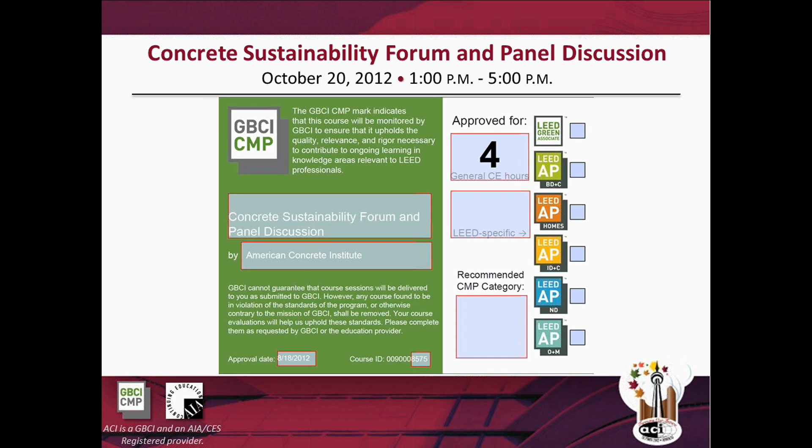The learning objectives are as follows: understanding the impact of climate change and resource depletion on structures and high-performance buildings; identify opportunities to mitigate the impact of earthquake, tsunami, and climate-related disasters on communities and structures; understand opportunities to balance the need for safety, durability, and resilience with environmental stewardship and economics; and finally, identify opportunities in the concrete industry for structural concrete, life safety, material selection, concrete repair, and enhanced durability to impact resilience and sustainability.

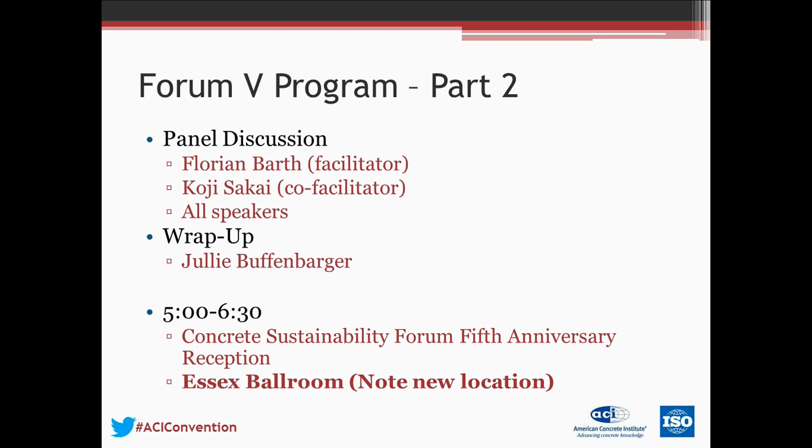So this is what we are going to do this afternoon. Enjoy the forum.

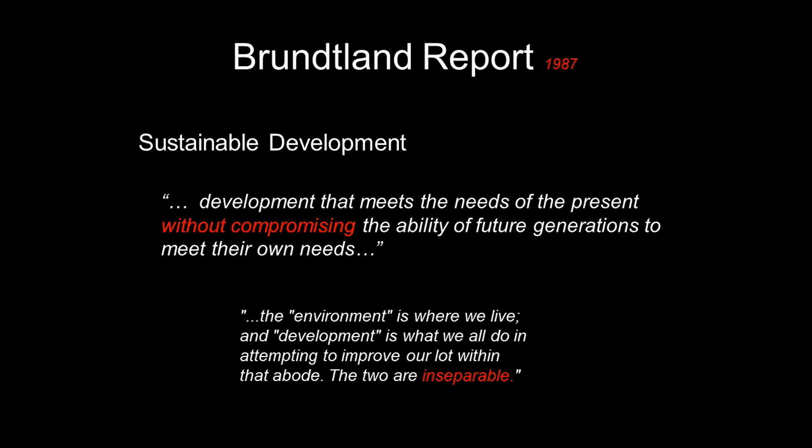Mrs. Gro Harlem Brundtland, who was a former Prime Minister of Norway, had been selected to lead this commission or working group from a United Nations designation, and I think it was very important work and really a very good timing in terms of the world and what was happening in the world with the resources.

I think the other thing that really came out of the Brundtland report were what are the pillars of sustainable development, and certainly economic growth, environmental protection, and social equality represent the pillars of the stool, if you will, a three-legged stool, which we need to stand on in terms of our design.

It's hard for me to separate my role, as I have two jobs, one job is to be a structural engineer, and the other job is to be chair of the 318 building code, this code cycle. So I'm going to talk a little bit about my look at sustainability as a structural engineer, and one of the projects that I'm most proud that I worked on was a very simple structure, but it really represented, I think, the key to what we're talking about in sustainability.

It's the repair of the Marina Del Rey seawall, which is in Los Angeles, California. I wrote an article with my colleagues on the project that appeared some 13 years ago in Concrete International in 1999. Marina Del Rey was the largest man-made small craft marina in the United States.

It was built by the Corps of Engineers in the late 50s and early 60s, just north of the LAX airport. Over time, it's actually owned by Los Angeles County, and they essentially lease land for development over a long period of time.

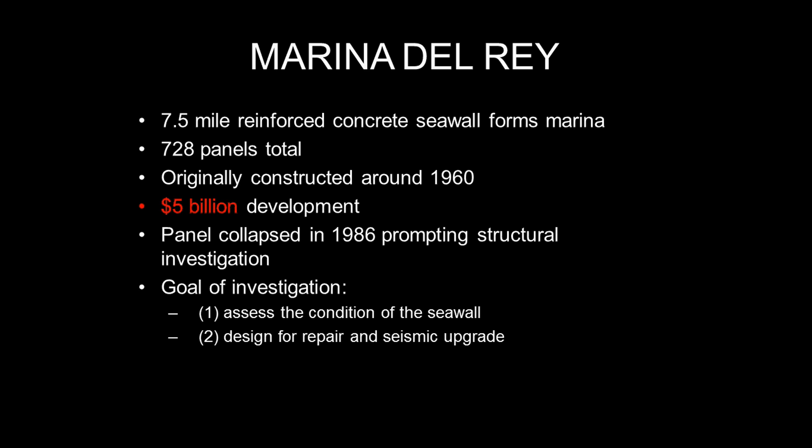And so we had to assess the condition of the seawall and design for the repair. It was obviously clear once we got into corrosion problems, but of course the other thing in the late 50s and early 60s, there really was not any consideration for seismic upgrading.

One challenge we found as a structural engineer is when you have that type of material, short of digging caissons or rehabilitating the soil behind it, there's very little you can do, and the cost of that is extreme. And we look at the economic challenge of sustainable structures.

I tell everybody, one piece of paper that I have in my file, that I always will have in my file locked away in a firebox, is a letter from the building safety person at Los Angeles County that says we're not responsible if there's liquefaction in this area. So I have that hidden away just in case it ever comes back to try to haunt us.

But it provided the uniqueness of it, provided the challenge: here's the structure we have to repair. There's all these things that we have to deal with, but there's not enough money in the world to deal with them, so you can only deal with certain realities. The reality was to make it stable for the corrosion aspects that had obviously deteriorated the structure, and also to upgrade it seismically for a more moderate earthquake, not one that would produce a high level of liquefaction.

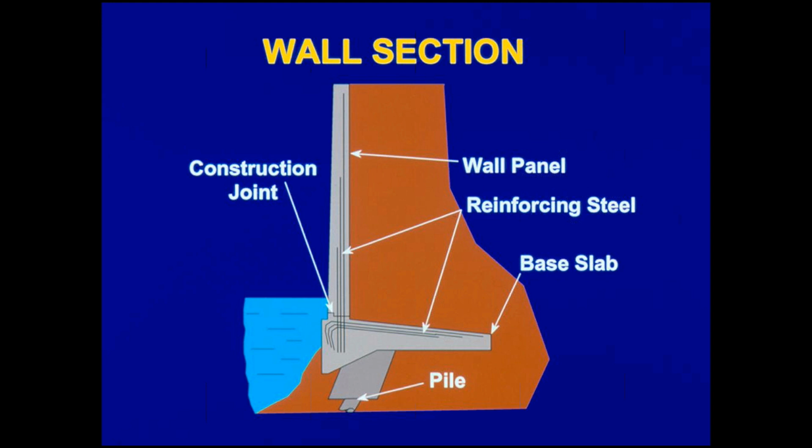The project evolved to look at replacement with other types of armament, if you will, in terms of protection. We were able to identify the damage on the back side of the wall using non-destructive techniques, namely impact echo, which let us identify delaminations of reinforcement and the areas they were occurring in.

So the system ended up being, as a retrofit, repair and rehabilitation for strengthening, caissons that were tied back to the wall. We had to utilize the existing reinforcement both horizontally and vertically, and the number of caissons was dictated by the amount of damage we found.

All wall panels had to have at least 3 caissons in order to strengthen the wall, but some, because of their condition, had to have 6. By prioritizing those panels and doing a custom look at each one, we were able to save on average 2.6 caissons per panel, which was a substantial amount of money.

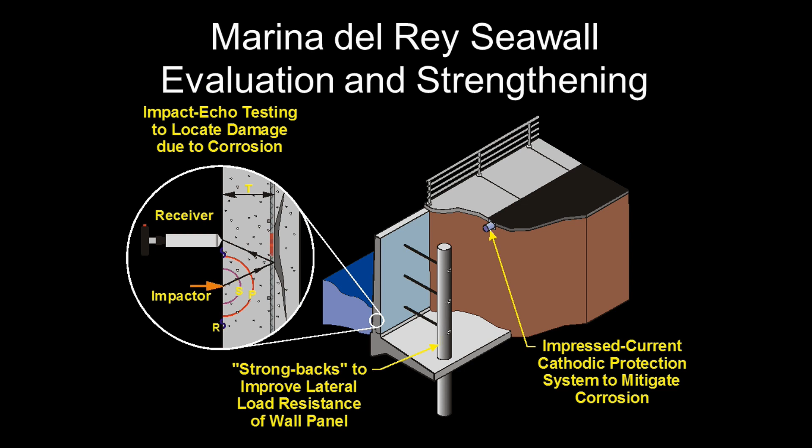So again, the overall concept was these caissons. There was an impressed current cathodic protection system put in place to protect the existing reinforcement we were counting on.

I bring this up again because as a structural engineer, the kinds of things we have to look at in a building code, whether it's the 318 code or the new repair code coming out by ACI, involve real economic challenges.

In this particular case, the reason I said it's not necessarily the most challenging in terms of engineering is that we were able to save a substantial amount of money by increasing the life of the structure from something that had been 25 years to something we believe will get another 40 years, with replacement costs in the range of $200 million plus.

The FIB Model Code talks about their new 2010 code regarding performance requirements for sustainability. Under Article 3.4 of their code regarding performance, they note that all aspects of design, construction, use, conservation, demolition, as well as recycling and disposal that are relevant to the environment and society are taken into account. That's a pretty bold, broad statement in the context of design.

I'm not sure what it means exactly, but I guess part of their effort in the code - and what you'll see we're doing in 318 - will be the challenge of what we mean by sustainability design.

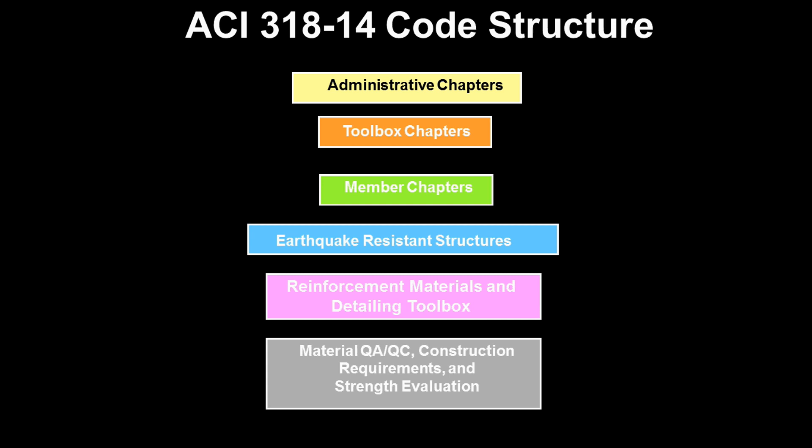When you go through a code chapter designed here on a beam, you're going to know at the end of that chapter that you've completed all the requirements for a beam. It's broken out into administrative chapters and what we call toolbox chapters, but the focus is on the member chapters. The decision was made that the earthquake-resistant component of design is still going to be kept separate—there have been a lot of changes over the last several cycles with that. We didn't want to disrupt the design community even more than we already were. Then we have chapters on reinforcement materials and detailing, and at the end is the construction process, where the QA/QC requirements are going to be located.

So here was our first attempt on 318. One thing you're going to find out is we don't make decisions very quickly on the building code. It takes a long time, a lot of votes, and a lot of times they don't go through.

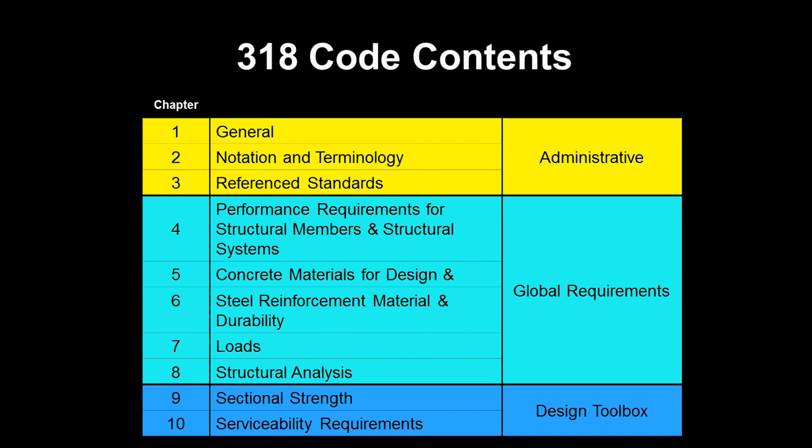So Chapter 4 is a new chapter called Performance Requirements for Structural Members and Structural Systems. It's new—we felt there needed to be an overarching chapter representing what the design guidelines were for in the member chapters, and that's a logical position where we might include something like sustainability.

So the first attempt stated: materials and components of structural concrete shall comply with the sustainability requirements in the general building code. Well, there were lots of negatives. Here's one: 'I agree that sustainability is becoming more important, but to state that all thoughts of any committee, 130 for example, shall be followed is way too strong. Let's see what they develop and what we might reference. Until then, delete this sentence.' So that was the first ballot.

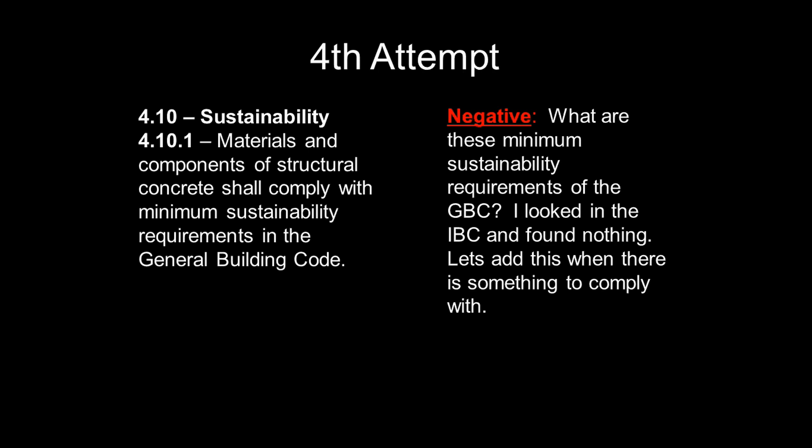Here's the fourth attempt, Sustainability section 4.10: materials and components of structural concrete shall comply with minimum sustainability requirements in the general building code. Well, appropriately, one of the negatives was, what are these minimum sustainability requirements of the general building code? They went to the IBC, the International Building Code, which is basically the model code most of the United States follows, and found nothing. The comment was: let's add this when there's something to comply with. Pretty fair statement, I believe.

So here's the final approved text that the committee agreed on—the section numbering had changed a little bit. Section 4.9: the licensed design professional shall be permitted to specify sustainability requirements in addition to the strength, serviceability, and durability requirements of this code. It's a pretty weak sentence in a lot of ways, but at least it has the concept of sustainability. You can see the focus is that we don't want to do anything in sustainability that's going to harm the minimum safety requirements of the building code. That's really the subtext of the message there.

Section 4.9.2 goes on to say that strength, serviceability, and durability requirements shall take precedence over sustainability, reinforcing that idea. In order to provide some emphasis in Chapter 4, we felt like we also needed something in Chapter 1, which is the introduction to the code, after all.

We're on the 5th ballot here, and we still don't have it approved, so that gives you an idea of how tough this job is. Really all we're doing is adding something on the right-hand side there, which is the commentary: the purpose of this code is to provide for public health and safety through structural strength and stability. This code is intended to be compatible with sustainable design principles that do not conflict with public health and safety. Pretty innocuous statement in our mind, apparently not to a lot of committee members. So we're on the 5th ballot of that. I think we may end up being successful with some additional wordsmithing, but those will be essentially the 2 locations that the 318 building code will identify aspects of sustainable design.

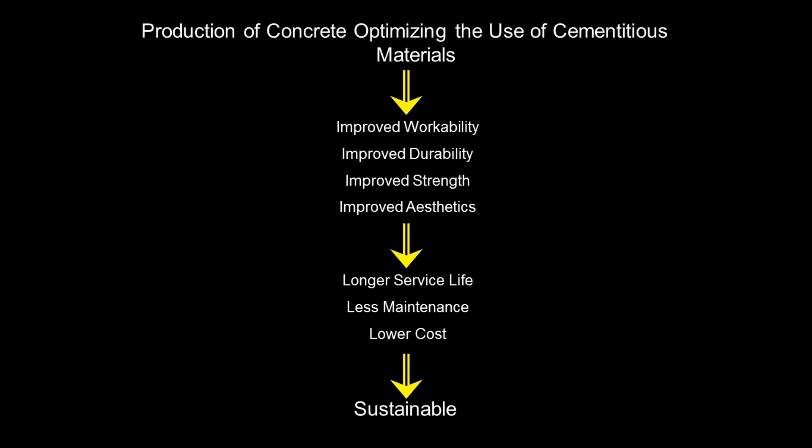As structural engineers, maybe we haven't given ourselves enough credit over the years that, in fact, that's what we have been doing. We just didn't call it sustainability. So we're recognizing now that some of the things we do in design can, in fact, lead to sustainable development, longer life, and the general good of society.

So what's the summary here? As you can see, it's something in the code. We've got a long ways to go. We're certainly not going to get much further in this code cycle where we're at. Certainly, I think what we've done is add to the code and take the charge from former President Barth and Staley very seriously, and have something in the code, at least in the spirit of sustainability. So with that, I'd like to conclude my presentation and be glad to take any questions.

Thank you very much.

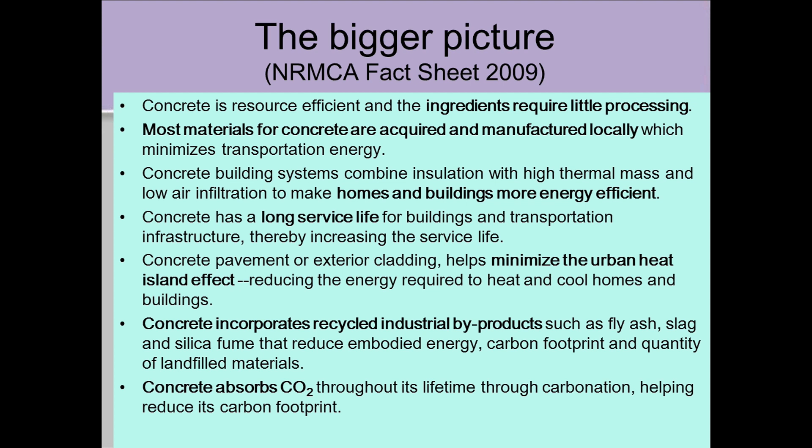Now, just to explore a couple of those issues: the embodied energy in a building from concrete, from the initial construction, is only about 10% of the total, maybe 10 to 15%. The rest of it's in the lifetime use of the structure, all the power and HVAC requirements are what eats energy. So if you can make an impact in your design using concrete to reduce that, you can have a much bigger impact than worrying about bits and pieces of the concrete mixture over the lifetime of the structure.

So there's another way, and the other way, of course, is to use the thermal mass of concrete elements to mitigate the HVAC requirements.

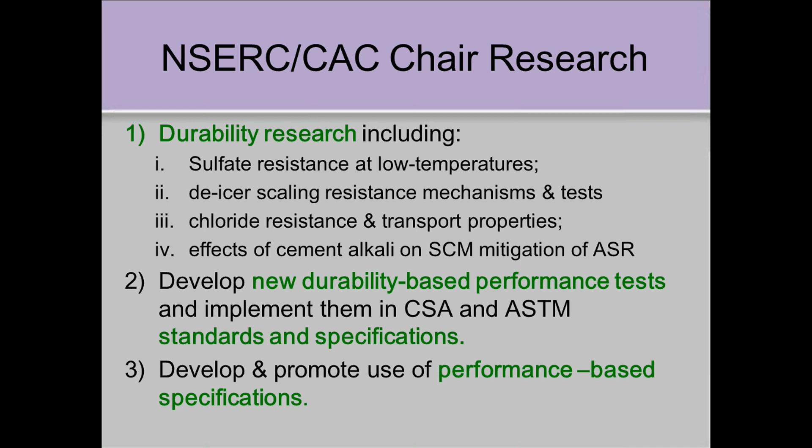And particularly on reducing the CO2 footprint of the concrete that's used in the first place. We've got a lot of students working on Portland limestone cements, which were introduced, and I'll talk about that.

Looking at the synergy of these Portland limestone cements with traditional supplementary materials like fly ash, slag, and silica fume in multiple blend binders, which are becoming more common.

We're looking at combined aggregate gradations, which is not new, but it's new to the Canadian code, to try to optimize the combined aggregate gradation. Because if you can do that, you can reduce the required cement content and actually improve the properties of concrete, reduce the permeability, reduce shrinkage, and other good things. We're also looking at non-Portland cement binders, alkali-activated materials, and doing work with recycled concrete aggregates.

Now I'll mention a couple of these things. We can do all these things at once. A lot of these aren't individual things you can only do separately — you can usually do almost all of them simultaneously, and we are doing them.

If you can reduce the cement content, as I mentioned, from combined aggregate gradations, and of course water-reducing admixtures will allow you to use less water, reducing the paste content of concrete, which allows you to get more aggregate in. The Portland limestone cements reduce the clinker content of cement.

And the way we've designed these Portland limestone cements, they have equivalent performance to Portland cements, so you're not losing anything — it's fairly transparent to the users. And of course, we can use cement replacement materials such as fly ash and slag.

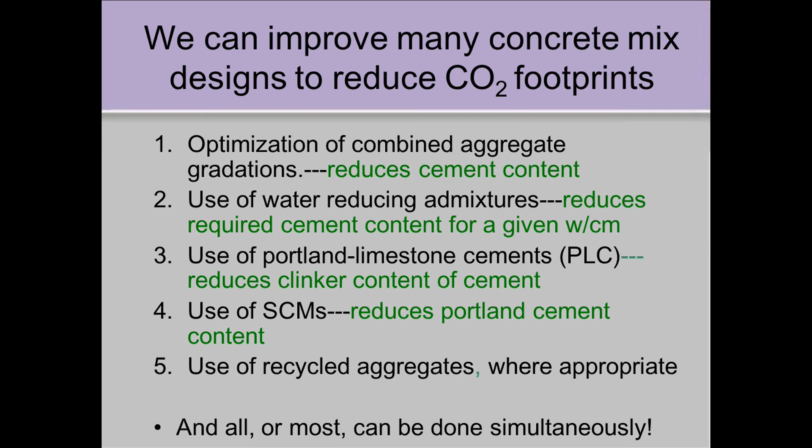And with recycled aggregates, I think we have to use them where appropriate, and we can use them. So the problem with the aggregates — a number of agencies in the U.S., various state highway agencies and others, have recognized this in the past; we're just a little slow on the uptake — is that meeting the individual coarse and fine aggregate gradations leaves a gap in the middle.

You end up with a gap-graded mix, and it's a huge impact in urban areas, because they're blasting these quarries, sieving it out for coarse aggregate, and throwing away a whole bunch of undersized material that's not allowed in the specification because of the gradation envelopes. Then they add the sand, and they end up with a gap where the stuff they just threw out would fit.

We're doing work on that for the industry, just to show that if you take an intermediate size aggregate, that could fill in the spaces. This is typically done more so in Europe, where they have multiple bin silos. This hasn't been the North American tradition to do that.

If you look at a grading curve, if you just took sand and stone, you end up with a little gap in the middle. It doesn't look like much, but it causes you to have issues.

Filling that gap in the mixes with 35 MPa or 50 MPa concretes, we were able to reduce the cement content of the mix for equivalent performance by up to about 16% of the cement binder composition of the concrete. So it's not a trivial loss of cement, but you get the same performance with less cement, and then you're not throwing away some of these quarried materials that were expensively crushed or blasted and crushed.

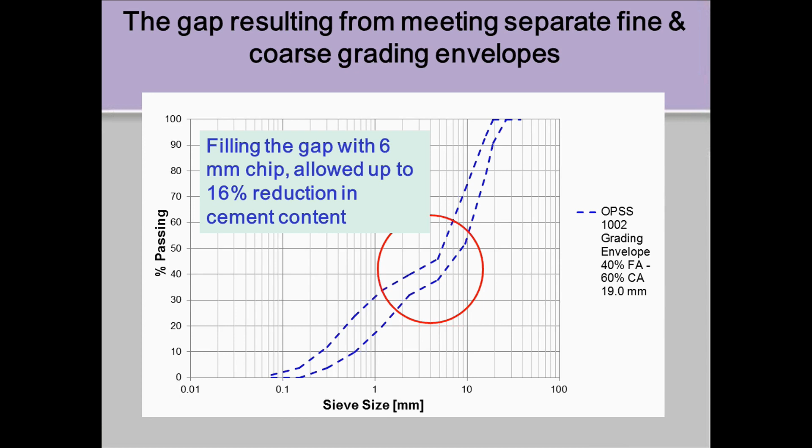Especially in urban areas, we're having to haul aggregates as much as 100 kilometers now to bring them into the city of Toronto, because they're not allowing any new quarries on the Niagara Escarpment, which is our traditional aggregate source. That's about 50 kilometers away, and they're having to go further afield for aggregates in a city that is growing rapidly. So it's a dilemma.

In 2008, we introduced a new class of Portland limestone cements. I was actively involved with doing that. It's up to 15% ground limestone, and that was eventually adopted in the concrete standard and eventually in the building codes in Canada. Effectively, that gives you the same performance with 10% less CO2 production.

So it's a big deal for the cement industry, because they potentially face threats of CO2 caps or taxes on their CO2 emissions based on point source emissions. So they've got to reduce their point source emissions. British Columbia already has such legislation in place, and it's costing the industry. So the limestone cements help them get there on top of what they were already doing.

Now, such cements have already been used in the U.S. for almost 10 years now under the 1157 performance spec, specifically in Utah and Colorado, two state DOTs that have allowed that. And finally, in 2012, the Blended Cement Code 595, which is spec'd by more people, has adopted some IL designations with up to 15%. So it's going to become a bigger issue.

We've been involved not only with the lab work that led up to this, but with field trials with the MTO, the Highway Department here in Ontario. We did several of them. This is just some barrier walls where we did some trials a few years ago to try and get things going, and we used them together with the traditional slag that's used as the local supplementary material in the Ontario market.

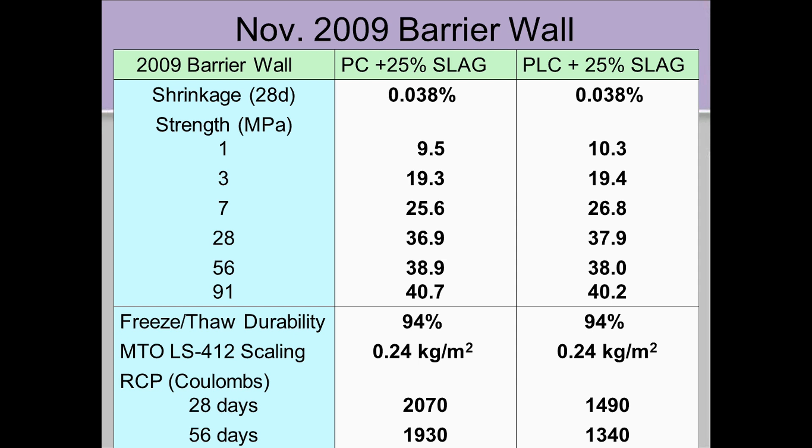And the Coulomb values, in terms of permeability, are essentially - well, they show slightly better here, but I'd say they're not different, because of other tests we've done as well. So without changing anything, they've got 10% less CO2 through more clinker reduction. We've done this in other studies.

We're doing a lot of work on sulfate resistance. Just to highlight the top row, if you just took a plain Portland cement concrete - these are 0.4 water cement ratio concretes, strengths from 7 days through half a year, with about 90% clinker content in that cement. But if you go down to the one I've highlighted, with 15% limestone in the cement and 40% or 50% slag, we're only using 38% clinker in that concrete.

So we've reduced the CO2 burden on the concrete by about half. And again, we've got equivalent strengths - maybe slightly less, 500 psi less at 7 days, but higher strengths at later ages - so big reductions in CO2. And if you go to the permeability, huge differences versus Portland cement if you use the limestone and the slag.

Again, we're seeing much lower permeabilities. It's not having any negative impact on the potential permeability of the concrete. So again, with reducing the CO2 burden, we're able to do that.

We've done some trials on sidewalks, just about this time last year, up on one of the highway interchanges being updated, using increased percentages of recycled concrete aggregate replacing the coarse aggregate. We only used 15% and 25% replacement to see if it could be used in concrete exposed to freezing and salt exposure. It's only been out there a year, hasn't been exposed to salt because the intersection isn't open yet, but has been exposed to freezing.

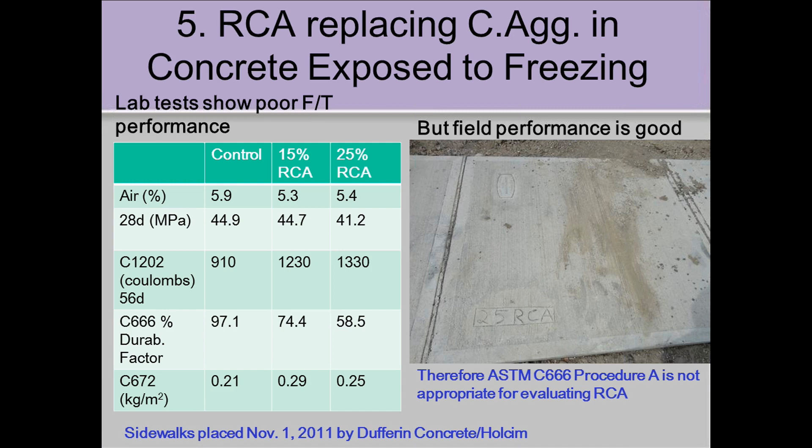And just for your information, if you landed at the airport, all the new aprons and around the terminal have half a meter of recycled concrete aggregate as granular base underneath, because they recycled all the concrete from the airport when they replaced two terminals and all the series of runways and aprons. They recycled the whole thing, about 140,000 tons.

And of that, about 75,000 tons got used as the granular base. Apparently they found that recycled aggregate makes a great granular base, and it actually cemented up and improved the structure of that pavement. It also saved a lot of trucks coming down the highway from over 50 kilometers away from the closest quarry to bring aggregate in for that purpose.

So it had a number of uses, and they're slowly using the rest of it. You can actually see the residual piles if you look certain ways at the airport, on the edge of the airport property. So we can do a whole bunch of good things to reduce CO2.

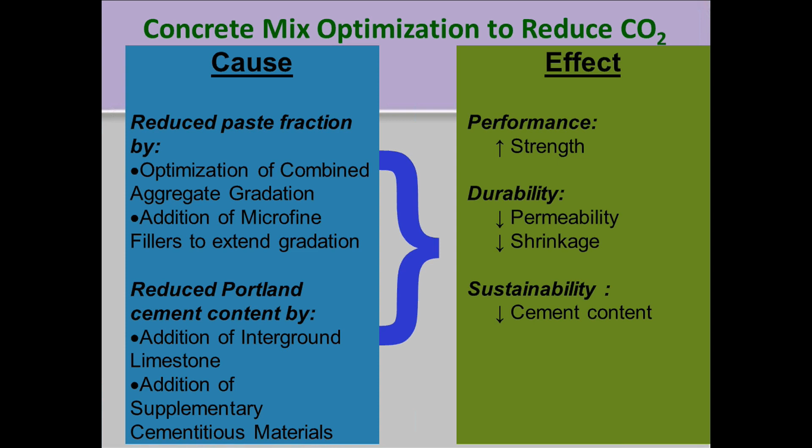In the mix design, we can optimize aggregate gradations. We can extend that with microfine fillers. We can use interground limestone. We can use SCMs. And we can make concrete that has reduced permeability, reduced shrinkage. We can reduce the cement clinker content of the concrete and up to strength.

Which means you could get down to about 160 pounds per cubic foot of - I guess that's cubic yard, that's my mistake, I translated it back, I don't know imperial units anymore - it's pounds per cubic yard of cement. We could get that down to about 160 pounds of cement per cubic yard and not mess with the concrete too much. We can make these concretes.

So that's a big improvement. How's my time doing? Am I good? Three minutes, great. I'm going to get nowhere with this. Okay.

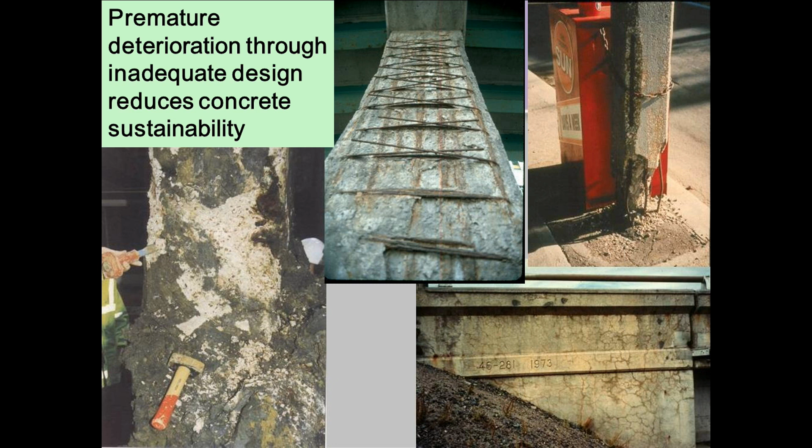What I wanted to talk about was performance specifications, because durable concrete is sustainable concrete. The longer we can extend the life of concrete, the longer that embodied CO2 and energy gets spread over the life of the structure, and that has a huge impact on reducing them. Premature deterioration is not what we want. So anything we can do to improve the durability of concrete will extend that lifetime, so we're not out there doing rehabs prematurely on things that could have been prevented with proper design.

Durability means more than just listing concrete materials in mix proportions. There's a whole bunch of things that are difficult to put in a code that need to be controlled: temperature control, protection of fresh concrete, curing, proper inspection, who does the inspection and testing. We need performance and objective-based standards to make these things successful.

Randy mentioned the FIB code. Some of the other components in that code is that they require you to actually design for durability. You actually have to do a service life calculation for whatever the durability exposures are, and they have equations set up as forces and resistances in a durability-based design in that code.

They also require the builder or the owner to be provided with a birth certificate of the building - basically, what was the design assumption, the design calculations, what were the requirements, and what were the actual results achieved in the construction process.

As well, they've got to provide the owner with a maintenance manual. Just like when you buy a car, you get a maintenance manual in the glove box, and it says how often you have to change the oil or do various maintenance operations. For the various parts of the structure, the owner is provided with this information - you've got to replace your joints every 15 years, this sort of thing.

And look at the bearings - they've got to factor that into the design, that if there's going to be maintenance required, they've got to incorporate making it feasible to do that maintenance as part of the design process in building the first structure, so it's not impossible to do that maintenance later. That's pretty interesting, and I know it's a long way from what the ACI code is doing now, and I think it'll be a long time before we go in that direction. But I think it's an interesting approach.

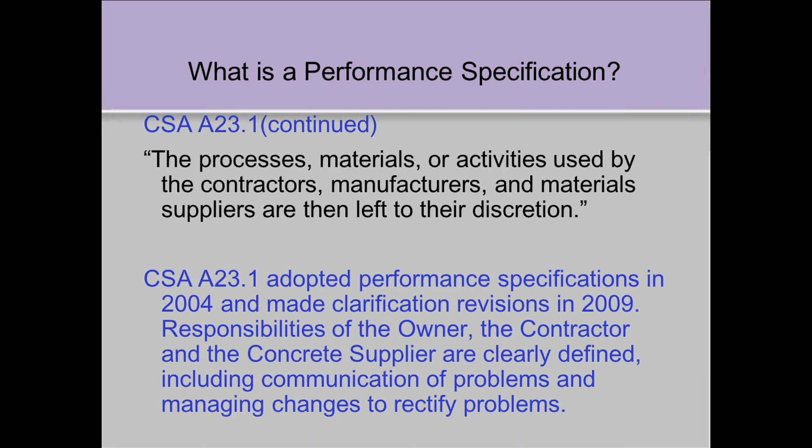The owner or the owner's representative doesn't want to take on the responsibilities of prescriptive specs, because when we identified the responsibility - if you're going to prescribe a concrete, then you take responsibility for the performance - they're going, whoa, wait a minute, we just want to prescribe it and get the performance. So when that's clarified and the roles and responsibilities have been clarified, it's made people jump back, and we've basically moved to performance.

I won't get into this because of the timing, but there's a lot of stuff going on in the U.S. John Bickley and I and Ken Hover had a hand in doing things through the NRMCA that led to the ITG document on performance-based specs, and now Committee 329 has started its work on developing an alternative performance specification for concrete at ACI.

And if you'll forego the, well, I guess we either have discussion or I give you an example. It's up to Mr. Chairman.

John Bickley and I worked on a large draft specification for some large expansion of mass transit. Basically, they had mass concrete, some sections 3 meters thick, 10 feet thick, all below the water table, so prevention of cracking was a performance requirement. The structures aren't going to be in service for months, if not multiple years, so 28 days isn't a criteria except from a scheduling point of view. And they wanted air-entrained, low permeability concrete, 35 MPa.

So we had to figure out what the objectives were. We needed to state the objectives, not what you've got to do, but what are the objectives. They want leak-proof concrete because they don't want water coming in, since they've had experience with leakage and corrosion, and they don't want water getting in.

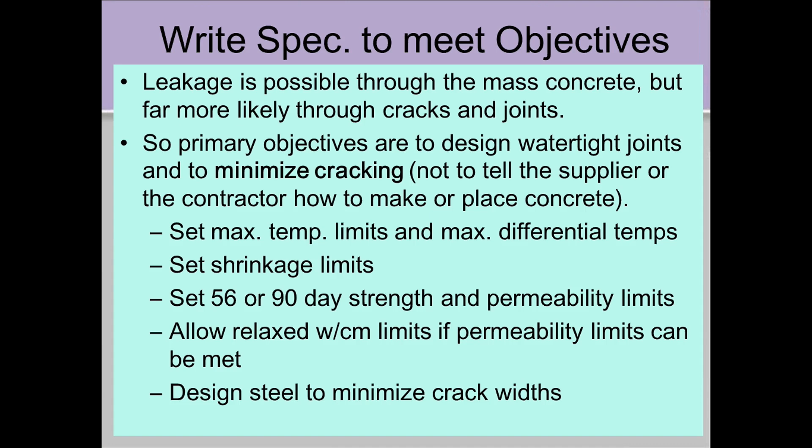We minimize the thermal gradient, and we want to design it to minimize crack widths. One of the things we wrote into this performance spec, and a number of jobs have used this concept, is we require the contractor to work with the supplier to develop mixes.

We require them to use a monolith test, which in our case suggested a cubic meter of concrete with insulated forms. Instead of casting cylinders and doing trial mixes with 6 by 12 or 4 by 8 cylinders, they cast a cubic meter of concrete with thermocouples in it, and they look at maximum temperatures, differential temperatures in the insulated mass, and then they take cores.

Their tests are all done on cores taken from that structure, not on things stored in a 28-day moist room. Some of these elements have actually used bigger sections, some of them 2-meter sections. So they've adapted this concept of using a monolith pour in their specs.

This is one trial mix we did with a supplier, and it just shows the temperature variations during the day at the surface and just near the surface. The internal temperatures went up to 60, and their gradients were about 20 degrees in this particular concrete mixture that they were evaluating.

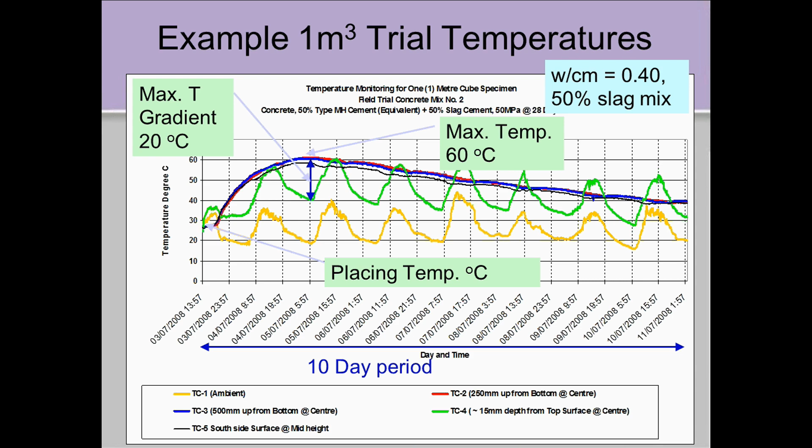We said, look, if you want 35 MPa, make it at 90 days, but if we're going to test on cores, you've got to take 85% of that for acceptance based on cores, so it's only 30.

We said, look, we take in-place air content and air void distributions rather than fresh air contents, at least in terms of the specification for pre-qualification, and we allow them to use the rapid chloride test, even though for service life, because they want 100 years from these structures, they use the chloride diffusion test.

We're saying you've got to calibrate that, because from a construction acceptance point of view, a diffusion test takes about 3 or 4 months to finish, and it's a useless test for acceptance criteria. It's great for pre-qualification, useless for acceptance. So get a rapid test in there just as a surrogate during the construction acceptance process. We wrote that in, and so we said it.

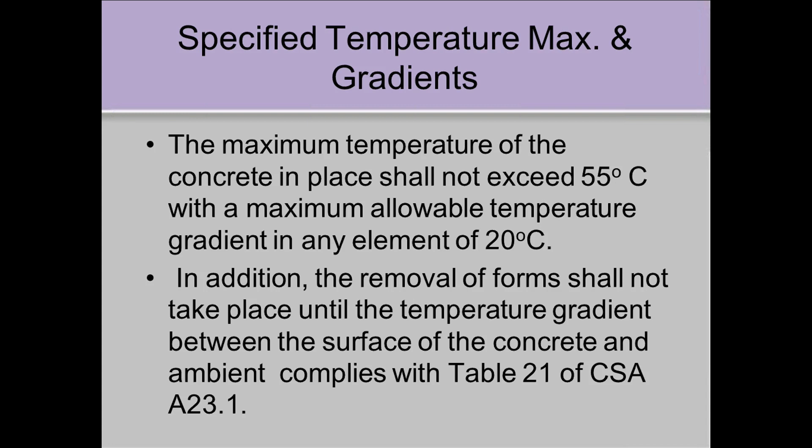And the same with shrinkage, we set a shrinkage spec. There is an option in the Canadian standard. And we set gradients, 55 as our maximum, with a maximum gradient of 20. And we tell them they can't take the forms off and covers off until they get within requirements of the CSA table, which has maximum temperature criteria for that.

We have some commentary about that given to them with the spec, saying, well, these are the objectives, and here are suggestions on how they get there. One of the things is that quality control is the responsibility of the contractor. They use certified labs, and they have to report that to the owner.

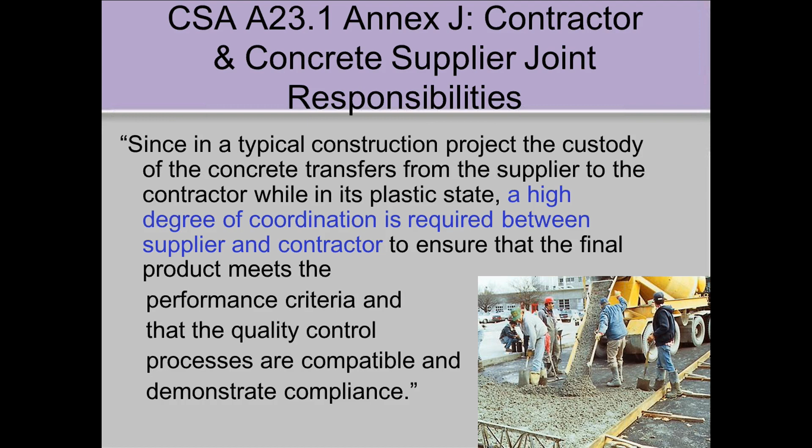Any problems that arise, they've got to communicate those and figure out how to correct that so it doesn't proceed too far. One issue the Canadian standard raises, which we reference in the spec, is the joint responsibility of the contractor and supplier. The owner contracts with the contractor, not the supplier. The contractor contracts with the supplier, but they've got to work together when you have an end result specification that the owner is buying from the contractor. So they've got to learn to work as a team, and that's worked quite well in a number of things.

Again, one key to making this work is pre-tender and pre-pour meetings, so people understand the objectives of what you're trying to do, what's special about this concrete if you're going to do something sustainable or durable. Because if you don't have everybody in the loop on the objectives, it may not happen in reality. Just putting it on paper isn't good enough—you've got to have meetings so everybody's in the loop. We've done this on a number of jobs with a lot of success.

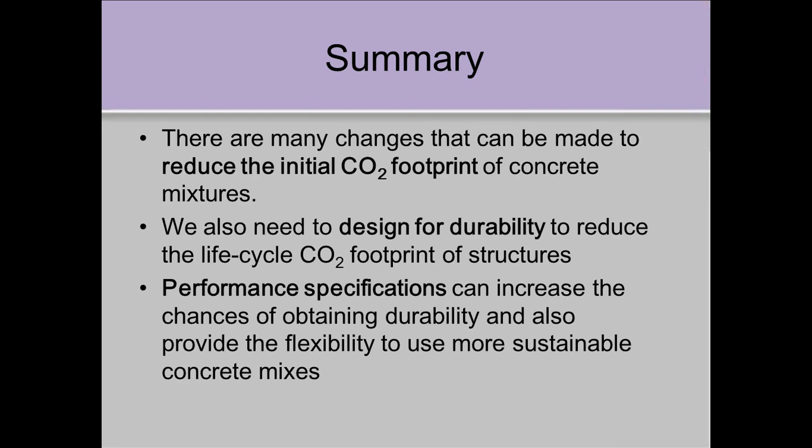So anyway, there's a lot of changes that can be made on the mix designs to reduce CO2 in the concrete in the first place. But if we can extend the life of the structure, we can extend that cycle and make the life cycle CO2 burden and energy burden much lower. Performance specs, through understanding what's required and specifying that, can increase the chances of obtaining durability and provide the flexibility to use more sustainable mixes. So that's my message—that's why I took so long.

Yeah, sure, no problem. So my name is Michael Collins. I'd like to share with you some thoughts on how we can improve the resilience of concrete structures.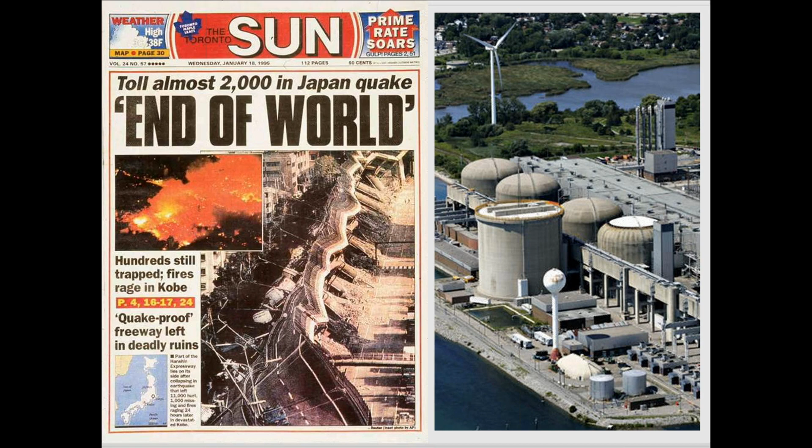How can we ensure that when we build a city like this, and more importantly when we look at it now, how can we ensure it's resilient, so that if something unexpected happens, we don't suffer in a disproportionate way? I'd like to go to my hometown of Christchurch, New Zealand, to draw some lessons that might be valuable for other cities around the world.

Christchurch is on the Pacific, built on the estuary of a river—the Avon River—which comes to the sea at a delightful little place called Sumner, where we have a summer house.

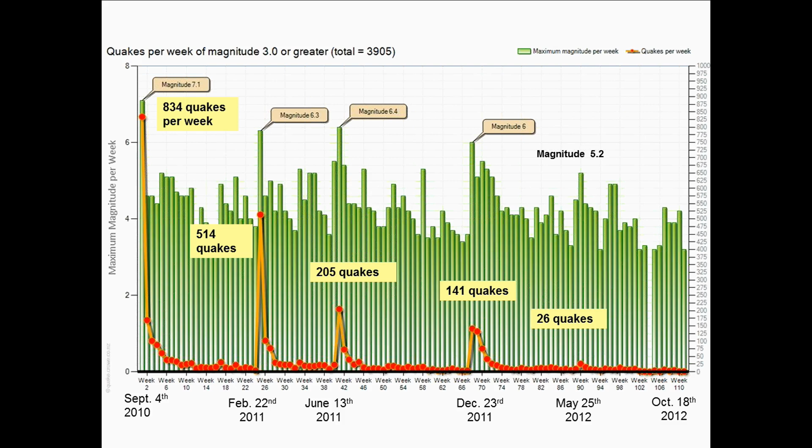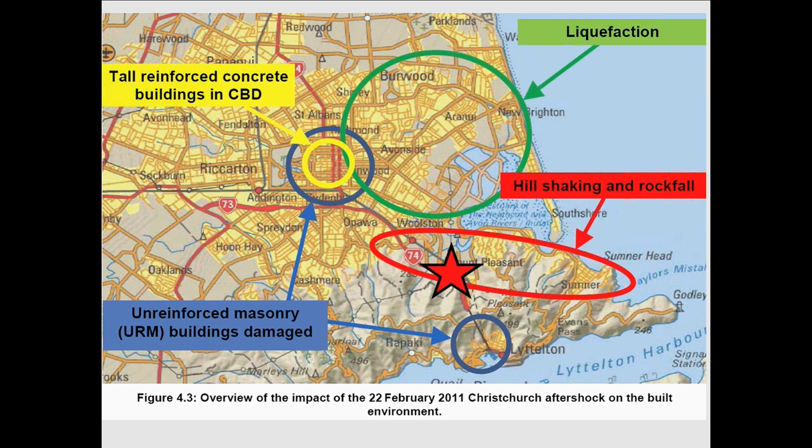I'm mainly going to talk about the tall reinforced concrete buildings in the central business district, but I can't resist going to the hill shaking and rockfall near where our house is. Our house is on top of that cliff. There's our house.

Liquefaction—Randy mentioned liquefaction. We learned what liquefaction meant that day. We drove through that, trying to get to my wife's mother, who lives alone and was 99 years old at that time. We visualized her buried under furniture. A 20-minute trip took us about 2.5 hours.

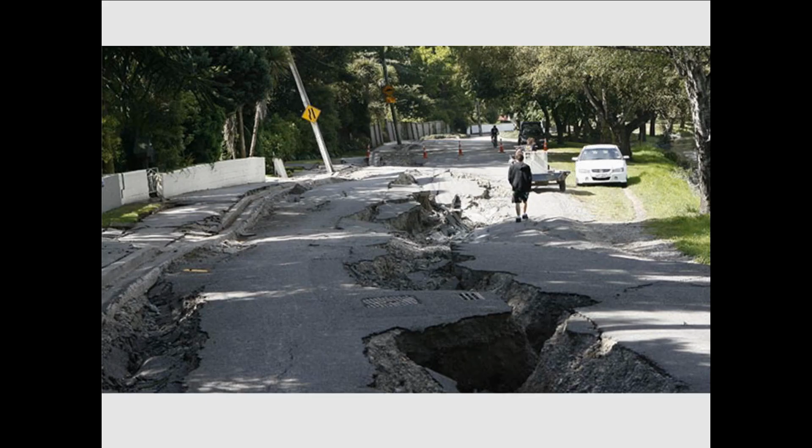One of the things you learn when a huge, unexpected emergency happens in your city is newspapers are very important. The power was gone—nobody saw television for weeks. The Press's building was destroyed; people were killed on the top floor. But you know what? At 6 a.m. the next morning, they delivered the paper. Every subscriber got a copy, and it came every day, and it was the center of information.

Also, huge numbers of people—the majority—were saved by passers-by. By the time the professional rescue squads got there, most of the people were dead. There were construction workers downtown fixing damage from the first earthquake, and they helped greatly in pulling people out, but it was by and large just volunteer passers-by.

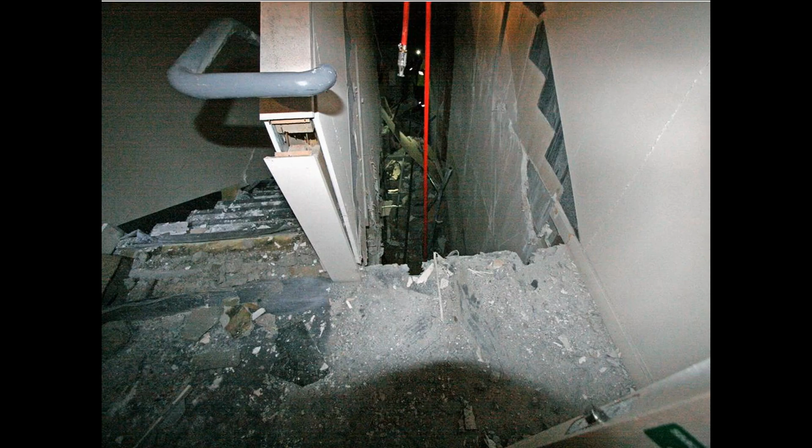There's the sort of stairway collapse that happened in a number of the reinforced concrete structures. This is in the tallest building in the city, the Grand Chancellor Hotel. There's the hotel with some of the damage, and there's what it's like if you want to get your car out of the parking garage of that hotel. This is the sort of rubble that's all over the place in the city.

Walking around the city a week or so after the earthquake, we saw building after building like this one, which just survived. You can see how it's on the verge of failure.

My specialty is shear failures, and I've tested about 800 relatively large beams in the structures laboratory just up the street from here, in my 43 years at the University of Toronto. In the few days in Christchurch, I saw more shear failures than I've seen in the rest of my life.

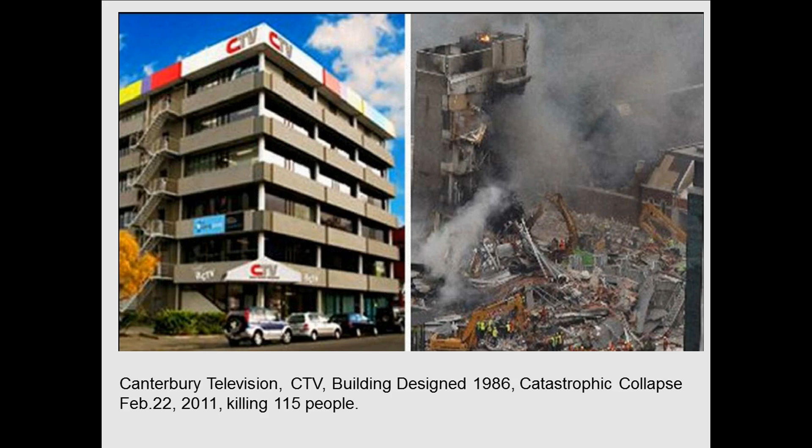Why is it so bad? Can you see those little columns? Those columns are really small. Not only are they really small, they have an incredibly tiny amount of transverse reinforcement - look at it, little wires. That's because these were designed as gravity load only. They're not part of the seismic force resisting system. So you don't have to have much. This building was designed in 1986, incidentally, long after good seismic provisions were in place.

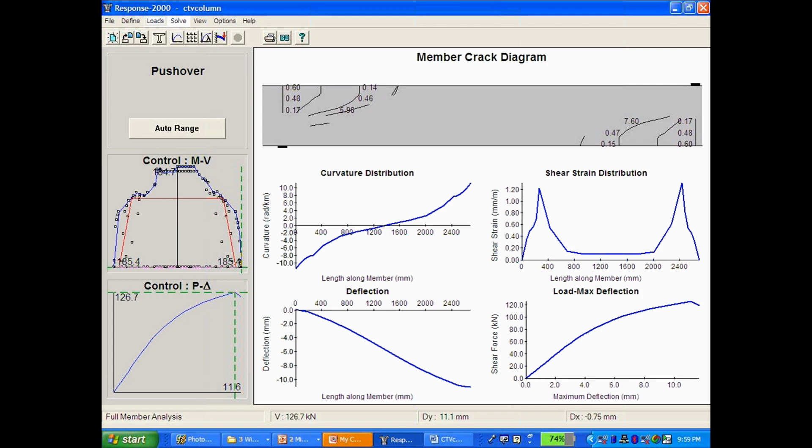What's going wrong? Well, we've done a lot of study developing models that can predict behavior. As soon as I managed to get the details on this building in March of 2011, I ran a simple analysis, which an engineer could literally run in 5 minutes once you got the details. It showed that column, under the high axial load that's on it - this was my estimate of the axial load, turns out it was quite good - cannot take more than half an inch of movement. So if you have a differential movement between the bottom and the top of half an inch, bang, the column is gone. That's what we call drift. And it's translating to a drift of about 0.3%. It's totally unacceptable. And 115 people died because of that.

Now, we may say that the reinforced concrete buildings and the steel buildings in Christchurch performed admirably, with the exception of those two I showed you that collapsed catastrophically. The people in them got out. Relatively few, hardly any people died in the modern buildings - they got out. But then, immediately after the earthquake, engineers said probably we'll have to demolish about 20% of the buildings. As they looked at them more, and as more and more aftershocks hit, in some cases buildings that had withstood the first fell down in an aftershock, including one that fell down with some inspectors in it, who luckily survived. As they looked at more and more, they realized that more and more had to be demolished. It simply wasn't feasible to repair them.

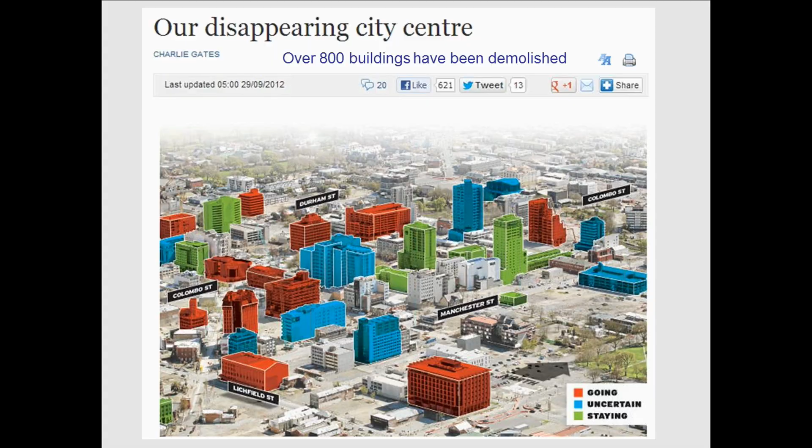Here's a couple of positive stories. There's a steel building, which was reoccupied in July, the first multi-story building to be reoccupied. And a combined steel concrete building, which is going to be repaired and performed very well in the earthquake, but it's in the cordoned off area, so it has not yet been reopened.

Here's some even better stories. There were only 2 buildings in the city that had modern damage limitation structures. One was a women's hospital that had been completed in 2005, and it had base isolation with rubber lead bearings, a system that was developed in New Zealand in the 1970s and has been applied a number of places, but very few were in Christchurch. There's a lot in Wellington, which is regarded as a very high seismic risk. Christchurch was not a high seismic risk.

This structure performed magnificently in all of the earthquakes that have hit, remained fully operational. The second one is a building using the PRESSS technology, developed in San Diego in the late 1990s—precast, pre-stressed concrete panels held together with clever energy-absorbing dampers. That building also performed remarkably well, staying fully operational during all the earthquakes.

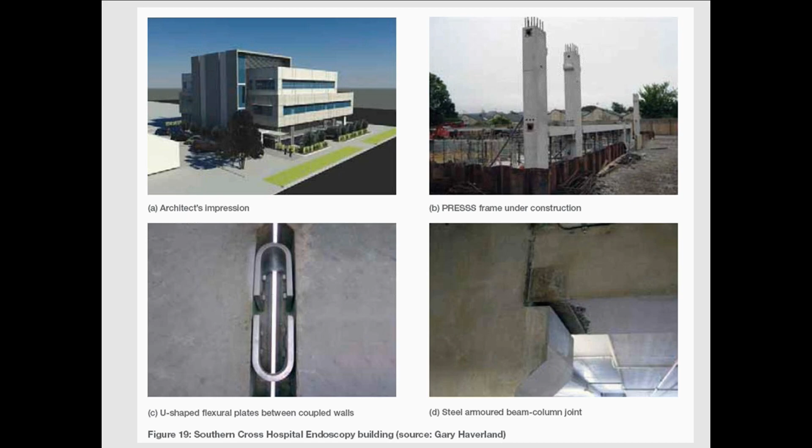And this is really what the message of Christchurch is. Yes, as Randy said, our traditional objective has been life safety. All of the engineers who designed their buildings were thinking about how they can make the building so that no matter how big the earthquake, the people will get out. But you know what? That's not good enough.

Because those buildings that stayed operational only cost—well, the base isolated hospital cost about 1% more due to base isolation. The PRESSS building hardly cost anything more at all. They couldn't identify any significant additional costs. So is it good enough to simply save the lives if the result is the whole community is destroyed?

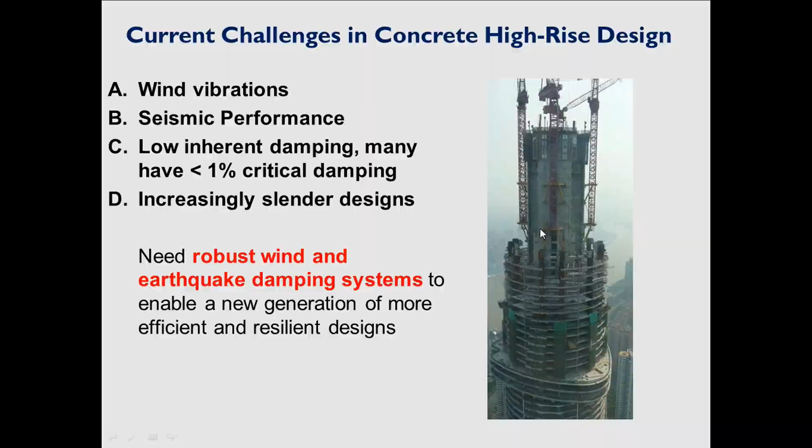We can fix this. Here's one way: viscoelastic coupling dampers, developed at the University of Toronto. Rubber is a marvelous material—200% shear strain, it tolerates easily. Full-scale experimental validation has shown wonderful performance. We can add up to 5% damping for expected events, and under extreme events we can still get even more. That really limits the damage.

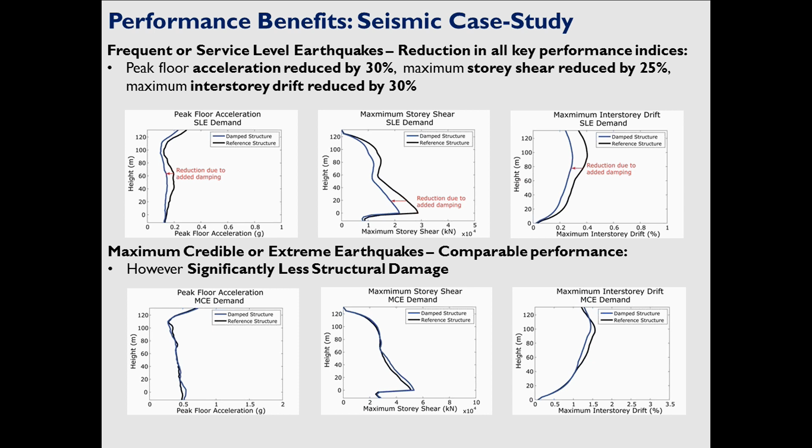This compares a structure with these dampers to a regular structure. The takeaway is there is much less damage with the frequently expected earthquakes, and the structure is easily repaired after the catastrophic earthquake that may occur only once every few thousand years.

So I leave you with this thought: the maintenance of the works is the most important part of the duties of an engineer. Wherefore it's necessary that the engineer needs to know which of the structures is in need of having money spent upon them. This is the statement of Julius Frontinus, who was the keeper of the aqueducts of Rome in the year AD 97. I believe our challenge is the same. Thank you.

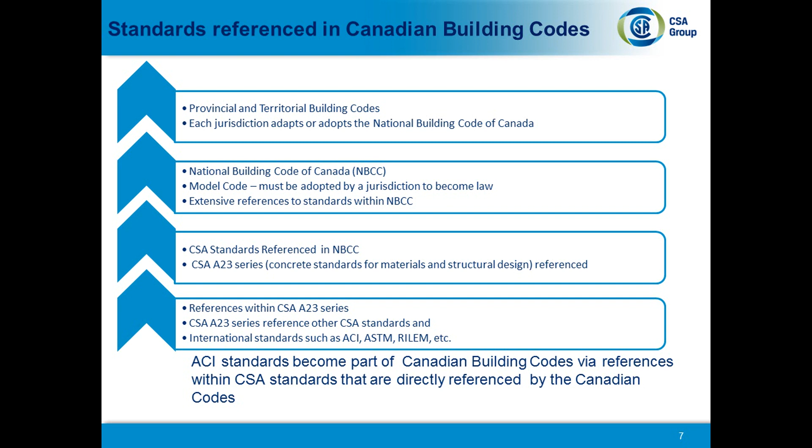There are extensive references to standards, including many CSA standards. For example, in the concrete area for materials and structures, both CSA A23.3 for structural design and many of the A23.1 material specs are referenced. The key takeaway is that as soon as we reference ACI standards, for example, they become part of the Canadian building codes. So we're a gateway, not only vetting for local relevance, but also a gateway for international standards into the Canadian codes and standards system.

Now I'm going to change topics. I'm going to talk about climate change adaptation 101.

I'm sorry for those on the webinar, you can't participate, but for those of you in the audience, please play along. This is probably the first time I've tried a pop quiz in front of a group this large, but we're going to go. So climate change adaptation — before I start, if you haven't heard about climate change before, put up your hand. Okay, so nobody in the room put up their hand.

All right, now climate change adaptation — if you know what climate change adaptation is, put up your hand. All right, I got a few hands up and a lot of people are tentative. So here's the pop quiz. For those of you who said you know what climate change adaptation is, I expect you to get perfect on this question. I'm going to skip over this particular slide.

Okay, here's your pop quiz. Which quote most closely explains what adapting to climate change is? You have 4 choices, 3 on the slide. The first answer: shy at parties, talk about global warming, it's a real icebreaker. Just wait for it, you have 3 more choices. Climate lasts all the time, but weather only a few days — that's your second choice. Third choice: the weather forecast for tonight, dark — that's George Carlin. There's actually a fourth choice, none of the above.

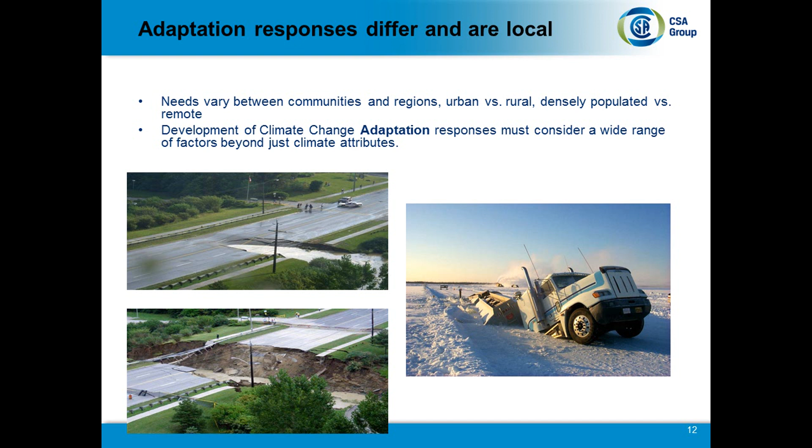So climate hazards for infrastructure, there's all sorts. There's more frequent extreme weather events. Extreme weather events in themselves are not necessarily a climate change phenomenon. Water damage, wind damage, very important for transportation engineers and builders is more frequent freeze-thaw cycles. And north of 60, in the northern circumpolar Arctic in Canada, melting permafrost.

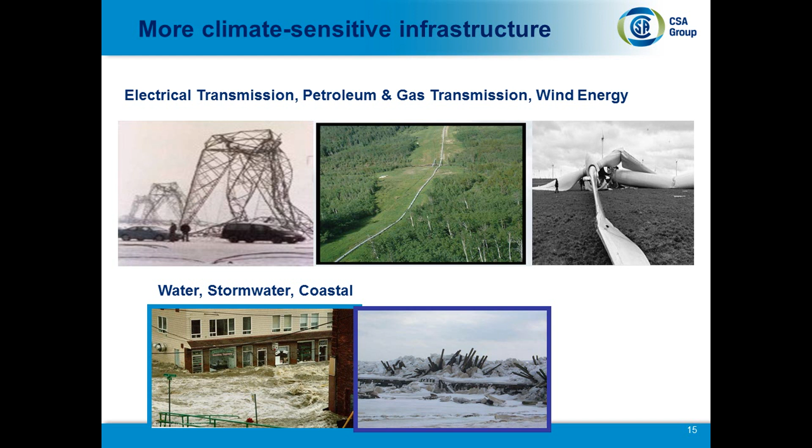So climate-sensitive infrastructure, or infrastructure sensitive to atmospheric hazards, includes transportation, roads and bridges, homes and buildings, electrical transmission, energy transmission, oil and gas pipelines, even things like alternative wind energy structures, floods, coastal—lots of infrastructure that's vulnerable to increasingly uncertain climate and atmospheric hazards.

So again, if you forget everything else about adaptation, this is the end of Climate Change Adaptation 101, or close to it. It's not primarily about GHG reduction or global warming. Yes, there's a little bit of overlap, but this is really about becoming more adaptable and resilient to either gradual or rapid changes in atmospheric phenomenon over a period of years and decades rather than days or weeks. So weather is about days or weeks, climate is about years and decades. It's way more ubiquitous.

So when we talk about developing adaptive responses to climate change, what you're going to see is that there are very few standards that have climate change in the title, yet there are many standards that can influence responses to and adapting to climate change.

In terms of solution development, a few years ago—and we've been looking at climate change adaptation for about 7 years now—up until a couple of years ago, there was only one type of response to increasingly uncertain climate change. That's no-regrets actions, which is a way of saying over-design your infrastructure, which of course is not very feasible, particularly when we have minimum building codes and we have quantity surveyors and so forth.

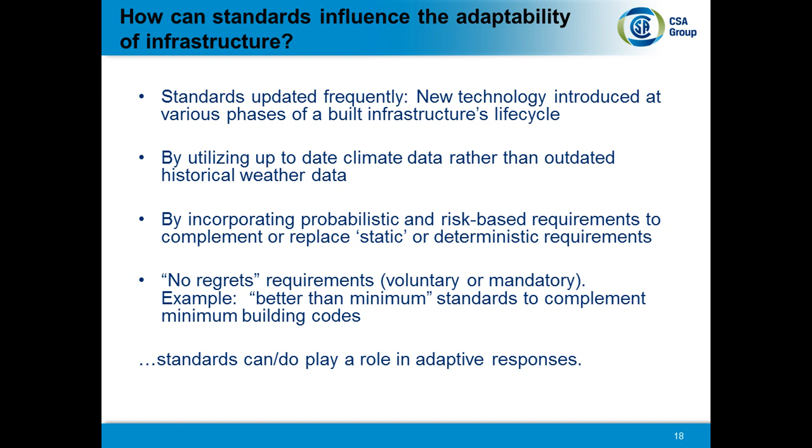In terms of predicting climate for the decades ahead, there are about 24 different international modeling centers around the world. None of those models are particularly accurate, so what most countries are doing is utilizing ensemble analysis. They won't just use one climate model—they'll use projections based on a combination of models to try and increase the repeatability and accuracy.

We talked a little bit about how life cycle and long life cycle in infrastructure provides windows of opportunity to actually upgrade infrastructure, and Michael Collins mentioned that not only designing up front, but maintenance is important. Of all the standards we have that have some sort of influence on resilience, guess how many deal with operations and maintenance versus design and build or repair and rehab? Anybody want to guess? Zero.

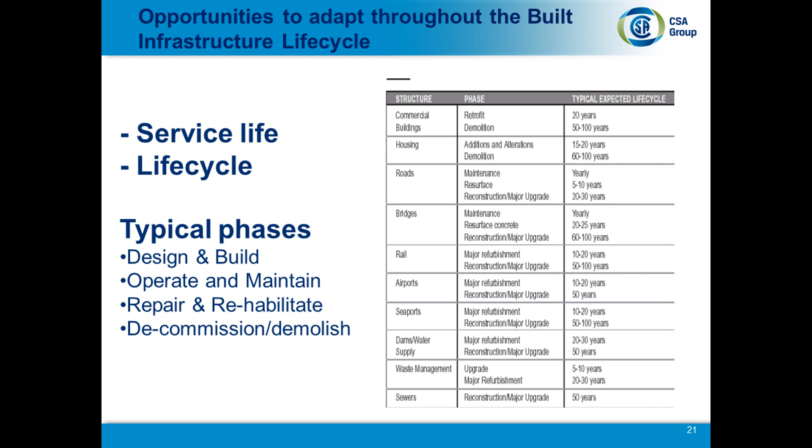We'll skip over this one. In terms of CSA, we've done 7 special reports. Of the 400 standards that have some sort of line of sight to built civil infrastructure, there are really 29 standards that have a profound impact on adapting to the impacts of climate change. Probably no surprise, a lot of them are in the structural design area, and some are in the material science area as well.

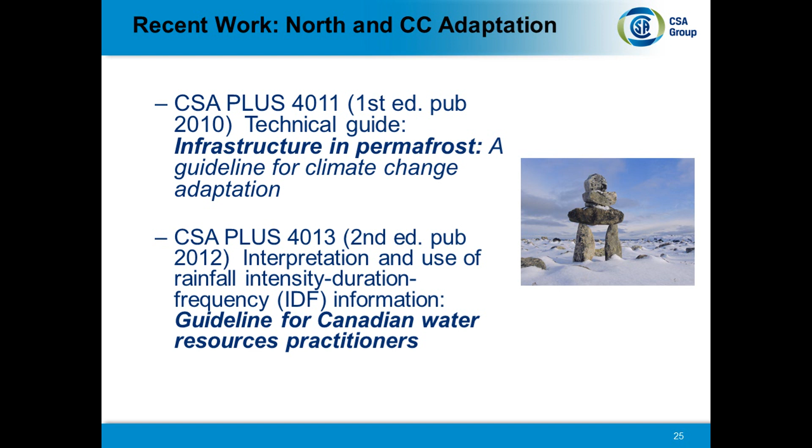In terms of recent work, we're doing a lot of work in the Canadian North. That's the canary in the coal mine in terms of climate change adaptation—warming in the circumpolar regions is happening much quicker. One example is the CSA PLUS 4011. It's the only guide or standard that actually uses climate change in its name out of all those 29. The key here is that in the north, ideally we'd like to build everything on bedrock—then we wouldn't have to worry about melting permafrost or global warming. A lot of communities, that's just not possible, so permafrost becomes a key element of the foundation. Changing permafrost conditions during the useful life really means you've got a high risk of a failed foundation.

So the guideline is an overview. It actually incorporates the risk-based approach, and it involves more than just structural engineers—it's aimed at a multidisciplinary team, so they're not just looking at first cost all the time.

I'll just wrap up. This takes you through some examples of the considerations involved—it goes from risk screening, and talks about how it incorporates the global climate ensemble analyses.

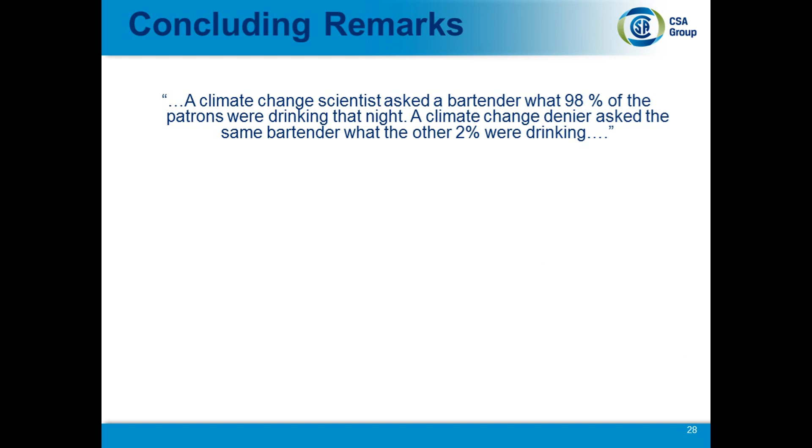Just in terms of concluding remarks, I want to say—this is taken off the internet, my favorite research source—the climate change scientist asked a bartender what 98% of the patrons were drinking that night. There was also a climate change denier in the bar, who asked the bartender what the other 2% were drinking. It doesn't matter, though. Here's the point: it really isn't about philosophy or ideology or politics. It's really about survival. It's only recently that even climate change deniers are willing to look at climate change adaptation, because it doesn't matter whether you think it was man-made or not—we're living in a time of increasingly uncertain atmospheric events. So it really is about survival.

Both sides are just recently starting to accept that we really do have to adapt, and built civil infrastructure, whether it's concrete-based, wood, or steel, really plays a role. Standards are playing a role as well. Thank you very much for listening.

Do we have any questions for the speaker at this time? I have one question for you. I don't rush off that easy.

You certainly said that standards are playing a significant role in how we adapt to climate change, and I think that's very true. Five years ago when we started looking at sustainability, no one really looked at climate change. They looked at mitigation to climate change, but not adaptation. What role, in your opinion, do we need to see changes in the way that we go about looking at standards to be more successful at adapting to climate change? And if so, if you could choose one specific idea that should be incorporated, what would that be?

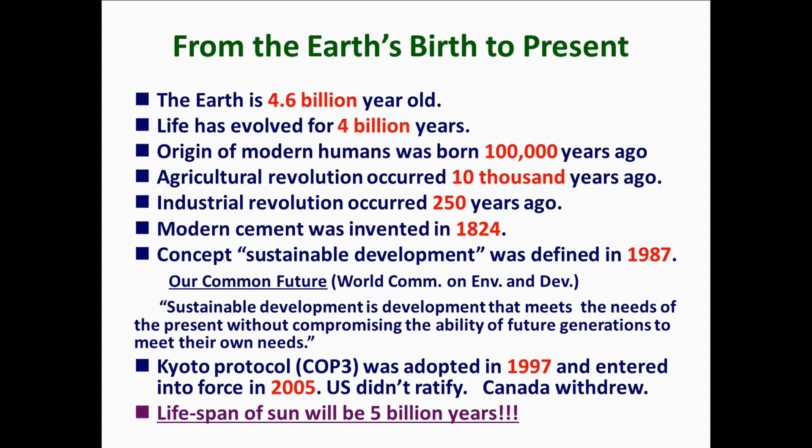But as you may know, the US didn't ratify this protocol, and I believe Canada recently withdrew from it. It is interesting to think that the lifespan of the sun will be 5 billion years, so it will burn out. So what happens then? This is the situation.

Let's see the change of the world population. In the Roman period, just 200 million. Right now, 7 billion. In the future, more than 9 billion. This means we have a drastic increase of resources, energy, and food consumption.

If you look at resource consumption, the population in developed countries, where most natural resources are consumed, is only 1 billion people. It's amazing. From that point of view, in order for the remaining people to consume the same amount of natural resources as in developed countries, we would need more than 10 times the current natural resources, which means the world population would need to be 61 billion people. So it's a serious situation.

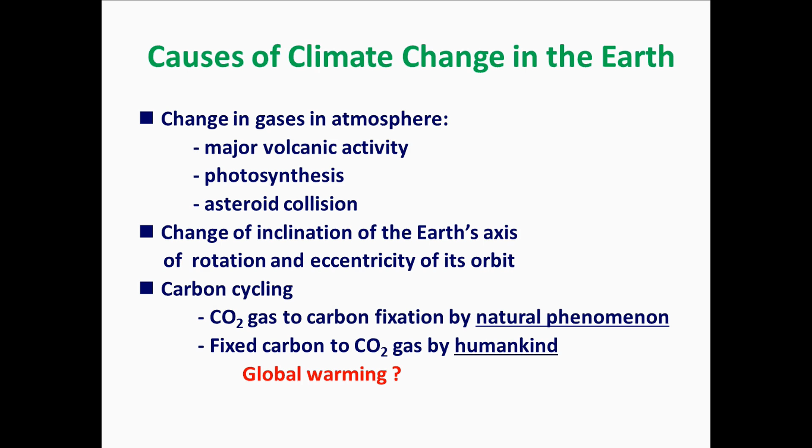As for the causes of climate change on Earth, there are several reasons. I'm not going to get into detail, but we can say there is carbon cycling—carbon dioxide gas to carbon fixation by natural phenomena long ago. Right now, the fixed carbon is released back to carbon dioxide gas by ourselves, which causes global warming. There are some people who don't believe in global warming, but still many people think this way.

So we can say that the greenhouse effect due to increasing carbon dioxide is very evident globally. Of course, we don't know exactly how much it will affect us in the future, but this is the fact that I know.

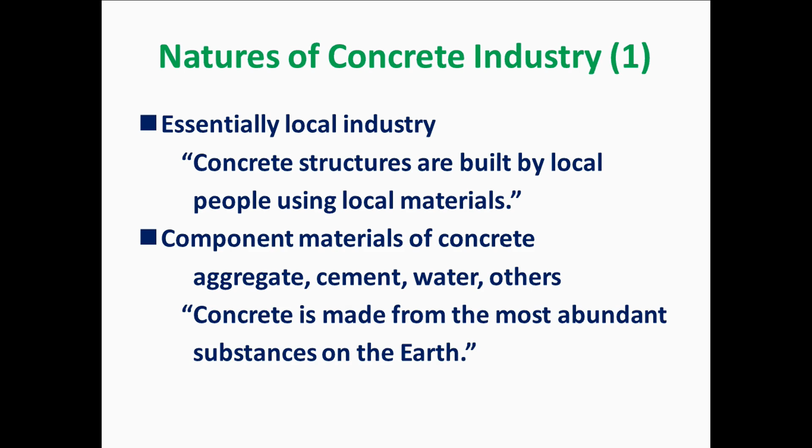Let me talk about the nature of the concrete industry, which is essentially a local industry. Concrete structures are built by local people using local materials. The components of concrete are very simple: aggregate, cement, water, and some other additives including admixtures. So concrete is made from the most abundant substances on earth, which is the reason its production has been able to expand to respond to growing construction demand.

Concrete, as you may know, is the second most consumed substance on earth after water—more than 20 billion tons, I would say 25 billion tons. We can say that contemporary society cannot exist without concrete. It's quite obvious that development of a nation is directly correlated to its consumption of concrete, which means increase of construction investment.

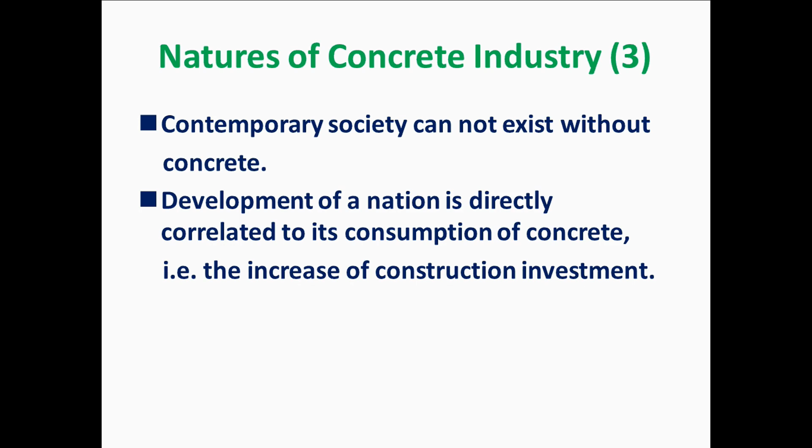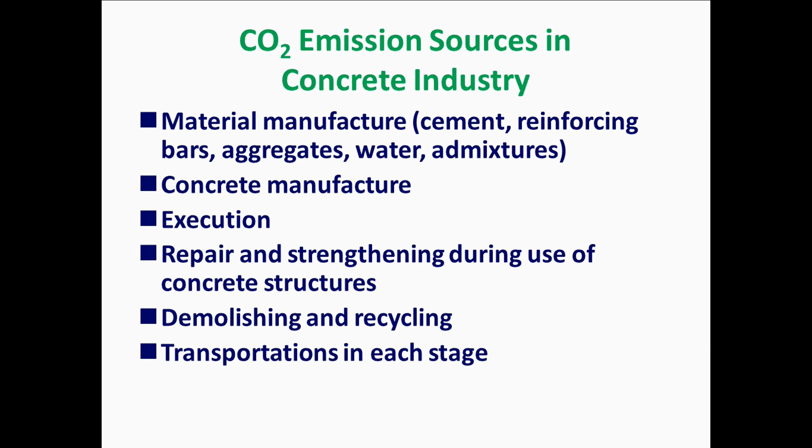CO2 emission sources in the concrete industry include material manufacture, concrete manufacture, execution, repair and strengthening, and also demolition and recycling. At each stage we have transportation.

So this is the current situation. As you may know, India has almost the same population as China. So in the future, if both big countries start consuming both materials, what happens?

CO2 emission in the concrete and construction industry: I roughly calculated that the concrete industry emits 5 billion tons CO2, and construction industry 6.3 billion tons. This number may be conservative. In the future, if it doubles, that's 10 billion tons for concrete industry and 12.6 billion tons for construction industry. This is my rough calculation.

So what are the problems of concrete from a sustainability point of view? Inadequate safety of concrete structures against unforeseen external force. How to set safety factors of materials, external forces, and others in design - this is the point we have to discuss today.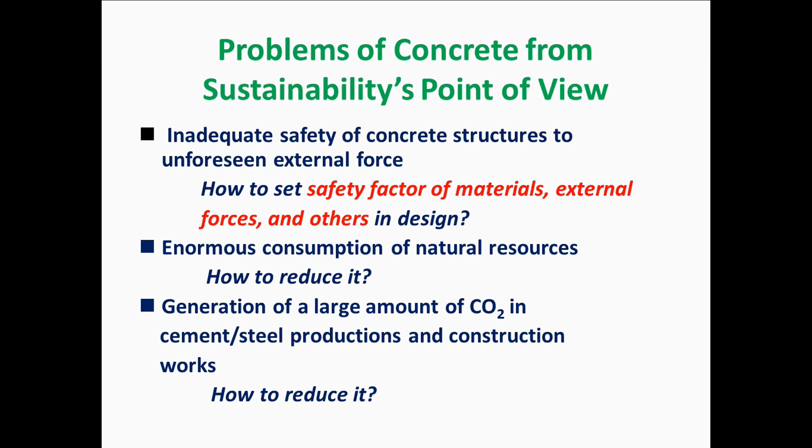The second point is the enormous consumption of natural resources - how to reduce it. The third point is the generation of a large amount of CO2 in cement and steel production and construction works - how to reduce it. This is the point.

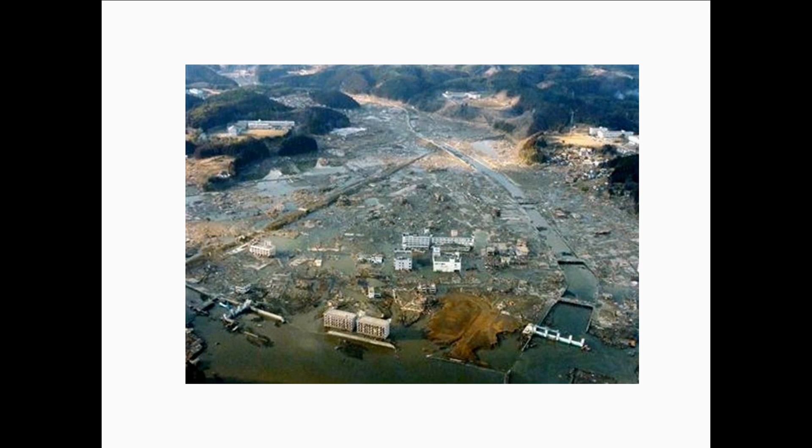Let me discuss the Japan disaster, March 11 last year. There was a tsunami, and this is the situation after the tsunami and earthquake. Some reinforced concrete structures remain, and this is quite clear - only the concrete structures remain, while wooden houses have gone completely.

So what are the lessons from the Japan disaster? We can say that without robust infrastructure, houses, and buildings, human society has no chance of sustainability, which consists of environmental aspect, economic aspect, and social aspect.

Let's look at the environmental issues. Due to this earthquake and tsunami, crust deformation changed the natural environment - meaning nature destroyed nature. A huge amount of rubble was generated, and huge amounts of resources and energy are necessary to rebuild infrastructure, houses, and buildings. Radioactive contamination also occurred in some regions.

How about economic issues? The economic activity in the region totally collapsed. Many people lost their jobs and therefore income. A huge amount of investment is necessary to reconstruct the region - 20 trillion yen is expected. We also need to clean up radioactive contamination, which takes time.

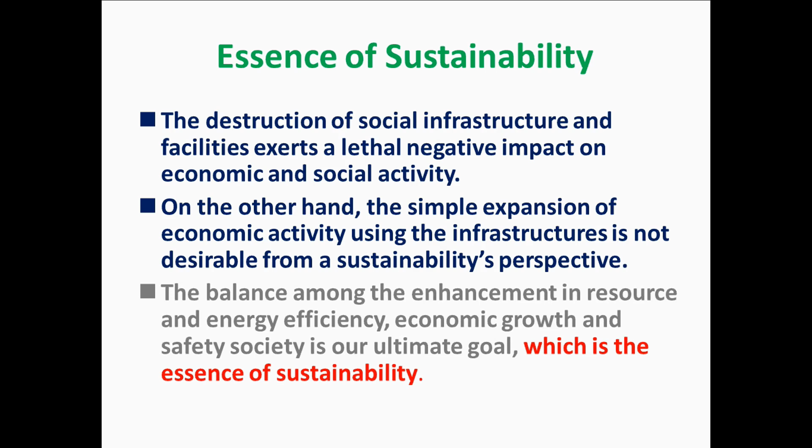So what is the essence of sustainability? The destruction of social infrastructure and facilities exerts a huge negative impact on economic and social activities. On the other hand, simple expansion of economic activity using the infrastructure we construct is not desirable from a sustainability perspective. The balance among enhancement of resource and energy efficiency, economic growth, and a safe society is our ultimate goal - this is the essence of sustainability.

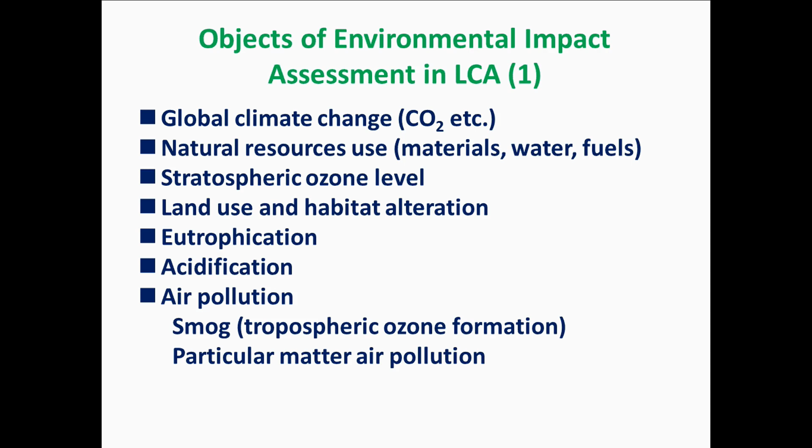The object of environmental impact assessment in LCA includes many aspects: global climate change, natural resources use, land use, eutrophication, air pollution, water pollution, soil contamination, etc. There are many aspects which we have to consider.

There are some environmental and sustainable standards for goods and infrastructure in ISO. There are three ISO technical committees dealing with environmental or sustainability aspects: ISO TC 207, environmental management; ISO TC 59, subcommittee 14 and subcommittee 17; and TC 71, subcommittee 8, environmental management for concrete and concrete structures, which I'm chairing.

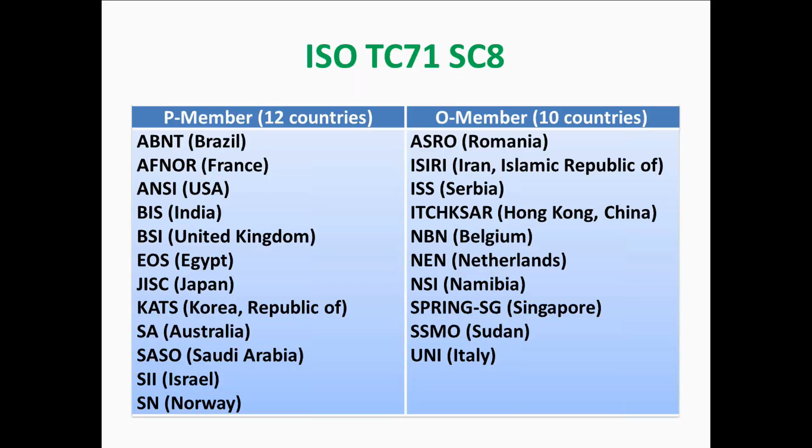This is the current membership of subcommittee 8 - we have 12 countries as P members and also 10 O members as shown here. We developed ISO 13315. We published part 1, general principles, and right now we are developing part 2, the system boundary and inventory data. We are supposed to develop the remaining documents.

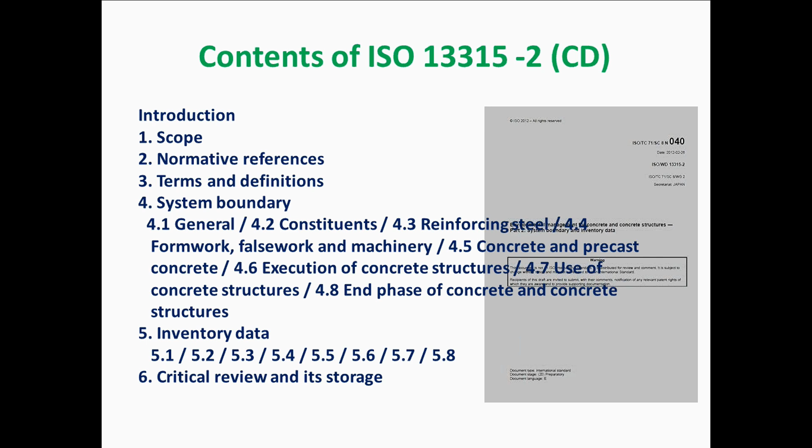I think the remaining time is 3 minutes, so I need to finish quickly.

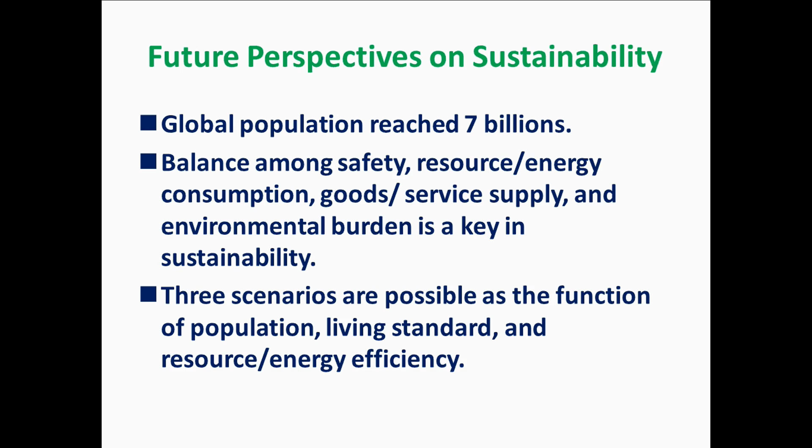There are many aspects, but that's why we have to consider sustainability for the future perspective. Global population reached 7 billion, and we need to consider balance among safety, resource energy consumption, goods and service supply, and environmental burden. Those are key in sustainability.

Let me go through the perspective towards sustainable concrete structures. Robust and resilient concrete buildings and infrastructure are the basis of sustainability. This is a very important point. But how do we balance safety, durability, and resilience with environmental stewardship? This is the point we have to discuss today. But there is a conflict among them.

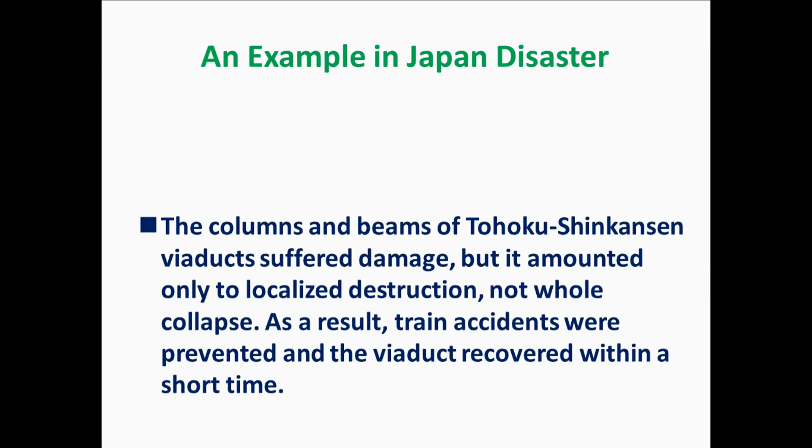By increasing safety while decreasing environmental burden - this is what we have to aim for in the future. I'll show you one example of this scenario.

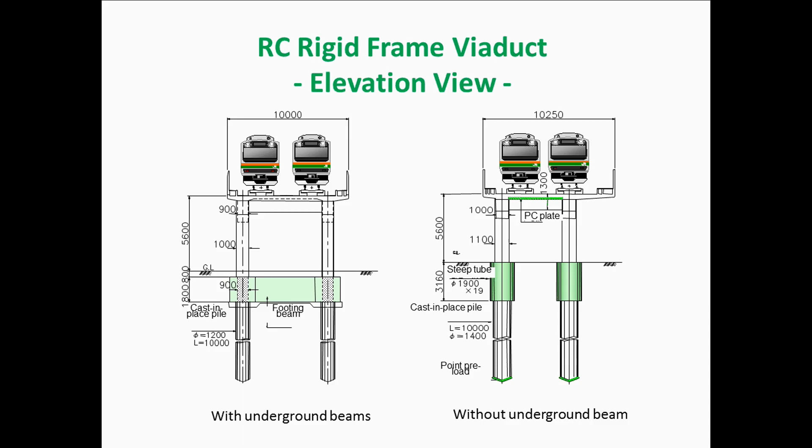This is two RC rigid frame viaducts. The left-hand side is the conventional one, and on the right-hand side, some new technology was introduced. We calculated the carbon dioxide, and with the new technology introduced, we could reduce carbon dioxide by 25%.

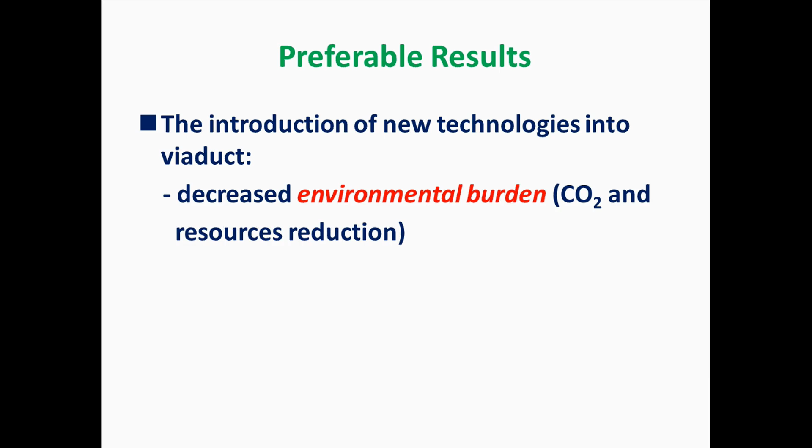We experienced the last earthquake in the East Japan Great Earthquake. The left-hand side was the conventional structure, and the right-hand side used the new technology. There was no damage. This means the introduction of new technology into the viaduct decreased environmental burden, CO2 and resource use reduction, and also increased safety - no damage in the earthquake. So this is the ideal direction. It's quite difficult, but we need to pursue that direction.

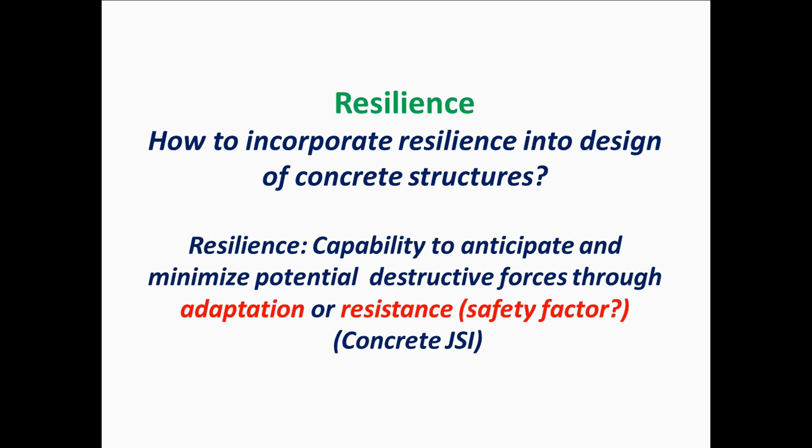And resilience - how to incorporate resilience into the design of concrete structures. According to concrete JSI, resilience is the capability to anticipate and minimize potential destructive forces through adaptation or resistance. We need both. This is the definition from the JSA and ASCE Committee on Critical Infrastructure.

Let me skip that. So, concluding remarks: there are two meanings in concrete sustainability. Number one, sustainability of the concrete industry, which means the concrete industry can have profit and employment through production of concrete and concrete structures. This is one part of sustainability in the concrete industry. The other part is concrete for sustainable society, which means low environmental burden, high safety, high durability, and high resilience.

A comprehensive method or system to incorporate safety, durability, resilience, and environmental stewardship into design should be developed. We need to consider safety and resilient design: how to set safety factors, how to introduce risk analysis, and how to introduce recovery systems. And also we need environmental design and durability design.